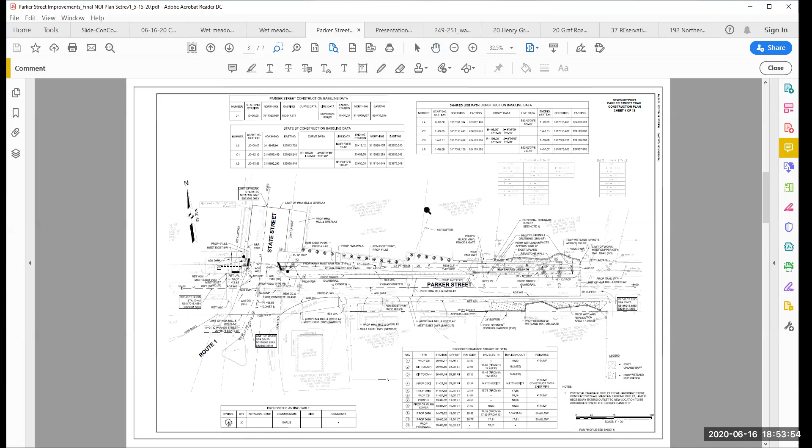So we were able to take a look at the A-series wetlands on Parker Street and look at the area of wetlands that would be impacted, as well as the area across the street that will be where the replication area is to be located. I'll let the commission speak for themselves on what they thought of that, but I thought the meeting was productive and it went well.

While we were out there, we did discuss the project with one of the employees at the Ace Hardware on the corner. One of the issues they wanted us to account for was a drain from their parking lot that outlets, they think, in proximity to the impacted wetland area. We did discuss that with them. This was an issue that Jordy Vining of the city had already discussed with the owner of Ace Hardware. We have a note on our plan for the contractor to keep an eye out for that pipe and that outlet, and if necessary, if they do run into that pipe, to extend that pipe and connect it into the drainage system we are proposing as part of the project, to make sure the water continues to have a place to flow to.

Could you expand a little bit on 'keep an eye out for'? Are you going to do some test pits and some exploring to see that, or are you just...?

Yep, I can speak to that. So essentially, we have a note that calls out the potential drainage outlet based on what the employees have seen in the past. Our surveyors were not able to locate that pipe. We think it's buried under sediment somewhere in the vicinity of the corner of the Ace Hardware property. So our note says: potential drainage outlet from hardware store, contractor shall maintain existing outlet and, if necessary, extend outlet to new location to be coordinated with the engineer and the city.

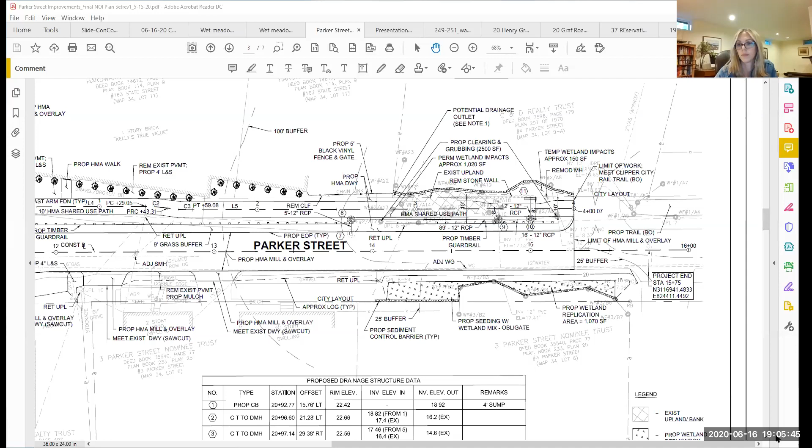I would expect there would be no change in their flooding of their parking lot in front of the store, unless while doing this work you accidentally come upon a broken pipe. Clear out stuff that's in front of the broken pipe, or at the end of it. Unless during the work it actually clears out an area where the pipe's backing up, then it would make it even better.

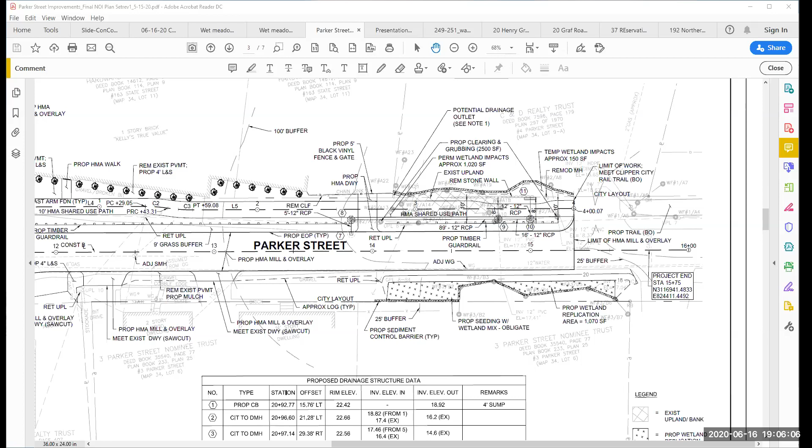Okay. What else? Any questions about the wetland replication area and how that's going to be handled? No, I think that was pretty clear.

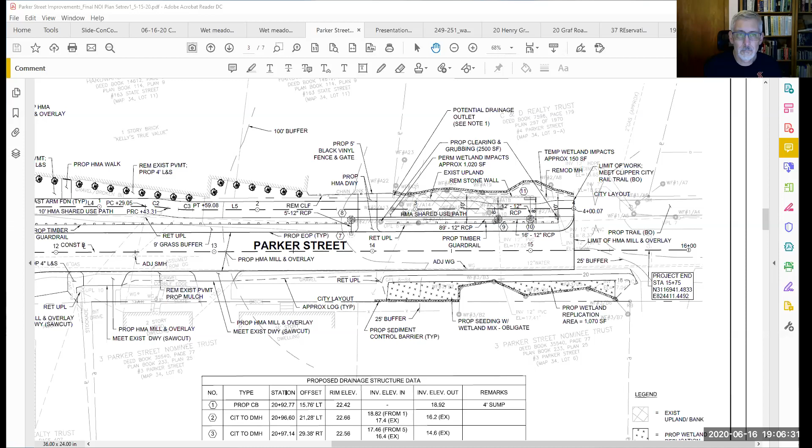Jordy, is there going to be a wetland scientist overseeing the wetland replication construction? I believe it's Mary Rimmer, is that right? Mary Rimmer. If so, that's great. If not, there should be someone on board. We should confirm that. We can put a special condition in that it needs to be overseen by a certified wetland scientist, monitored for 2 years, and all of those special conditions.

Pete, are you still there? The plan does call for oversight by a professional wetland scientist. But if the city standard is 2 years, then that would probably make sense to include as a condition.

So how does that work functionally with, we have presumably Mary, who's been part of the team to date, and there's the construction administration phase. And then in terms of 2 years out, does that mean that the city, through the planning office or maybe the Parks Department, essentially periodically hires Mary to go out there and inspect and monitor?

I would just say, you probably already have a contract with her, right? But if that could be extended or modified to include annual monitoring for 2 years for survival and success of the replication area, that might be a way to do it. Otherwise, you could do a separate contract with her. We've done that for some wetland monitoring with her in the past too.

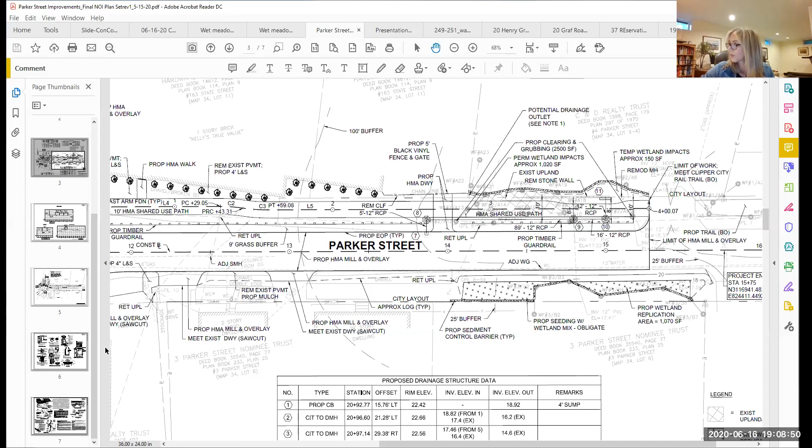Okay. All right, do we have anything else? No. I did not see anything. Anybody from the public have any comments? Seeing no raised hands, I'm going to assume not.

What do we want to do? Motion to close the public hearing? Second? Okay. Paul Healy, yes. Steve Moore, yes. Dan Warshall, yes. David Vine, yes. Jane Sender, yes. Ron DeCola? I'll take that as a yes, Ron. Yes, sorry, gotta unmute. And I say yes.

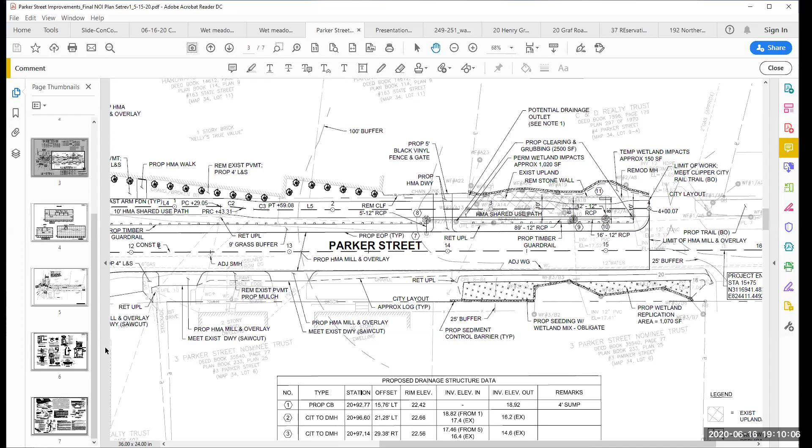Next item on the agenda is Michael and Karen Costello, 249, 251 Water Street. Notice of intent continued from technically May 19th.

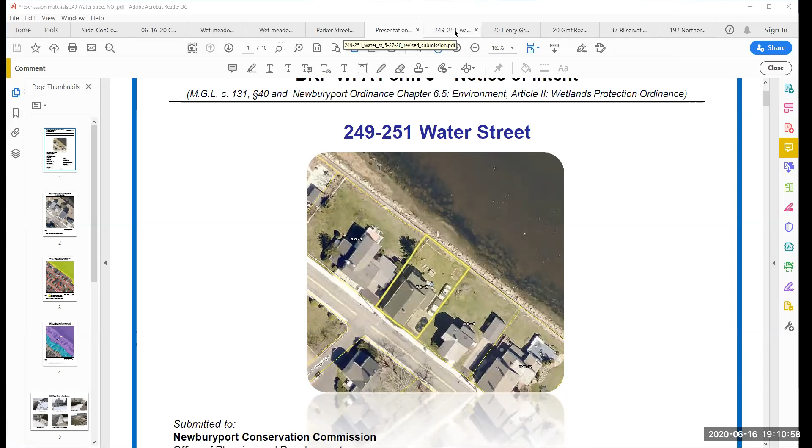I think let's just jump to the revision plans, which are at the end of the revision submission. Is that this? No, I think that's the original. Well, no, that is revised. Okay, so that's the revised one.

Also I've got Steve Sawyer, Eileen Graff, and Lisa Mead all here on behalf of the project, and in the audience out there are the Costellos as well, I believe.

Let me go over what we did. Since our last hearing, we held a site visit and reviewed site conditions. We took a lot of the comments from the last hearing, considered those, and put them together into some plan updates and changes. What you're looking at, we now have a plan set of 3 plans. The plan in front of you shows the different foundation lines, and we put a color-coded key off to the right under the stamp, trying to make that easier to read. So that's one thing that came out of the last hearing.

The other thing, because of the concerns about what we had in front of the structure to protect it, was basically a foundation wall with a filled patio behind it that held up the second floor deck and addition. We changed that over to a deck, now supported by columns. It's open underneath, and we put stone in there.

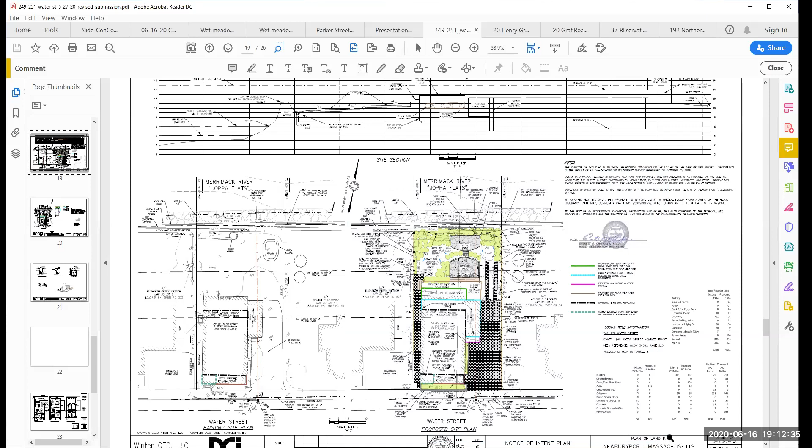I think it might show better on the next plan. If you zoom down, you can see where there's text within that area that basically says rock under. So what will happen is the proposed deck has rocks under it, so that any flood water would basically be dispersed by the rock underneath rather than having a wall there.

The other thing we did is we took the curbing around that patio, which had been vertical, and we turned it into sloped granite edging. So we got rid of a lot of the vertical elements, and the stairs are now open tread.

What I can do is turn it over to Steve Sawyer, who can go into a little more detail on the engineering updates that were done, things like backflow preventers, and some slight changes to the grading to make that work. I think what we've done is come up with a change to the project that actually improves the way floodwaters behave on the site over the current condition, where you have the vertical face of the house going right down to grade with nothing to break up the energy, and behind it a foundation that would not do so well if subject to any fast moving water. So, Steve, do you want to describe some of the changes you made in terms of adjusting grades to make sure water wasn't flowing off site?

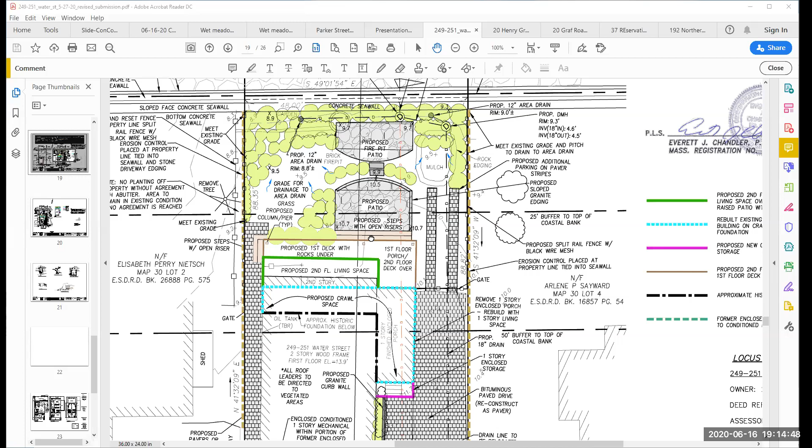Based on the site visit and the concerns of the commission, a couple of things we did, as Tom mentioned. If you pan up a bit, just that seawall again, the section. The top of that seawall is roughly, what is that? I believe it is 11, a little bit over 11.

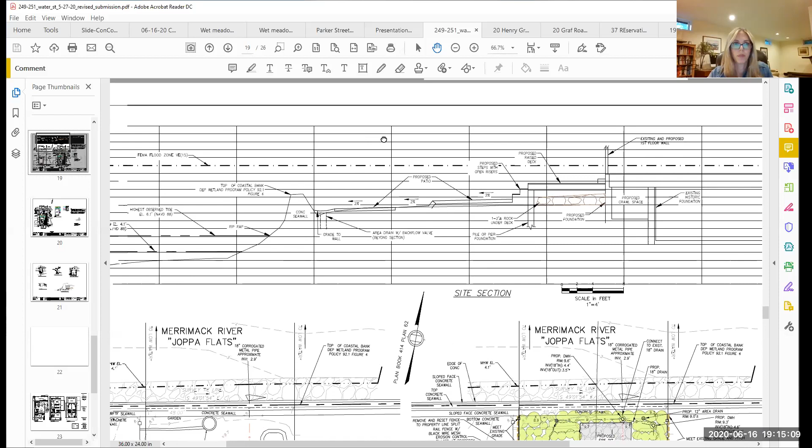So what we did is, say you had a flood of around 10 or so, and a lot of wave action that ran over with any kind of velocity, we took all the sharp edges off, so the water would run up and run through the stairway, the open stairs, and then dissipate. The energy would dissipate. Prior, as you remember, we had a filled patio there with a face, so there would be some refracting off of that face where those two stair treads are in those types of events. I think this addresses the concerns we heard, and it would definitely mitigate any of the wave energy, being absorbed through the stairs and underneath the building.

Important note: once we get up above elevation 11 into 12, all bets are off. It may tend to break the wave energy down, because prior there was the original vertical face that would refract it. Now at least there'd be some obstructions to break the waves down, so you wouldn't have a vertical face where waves would tend to refract off in different directions.

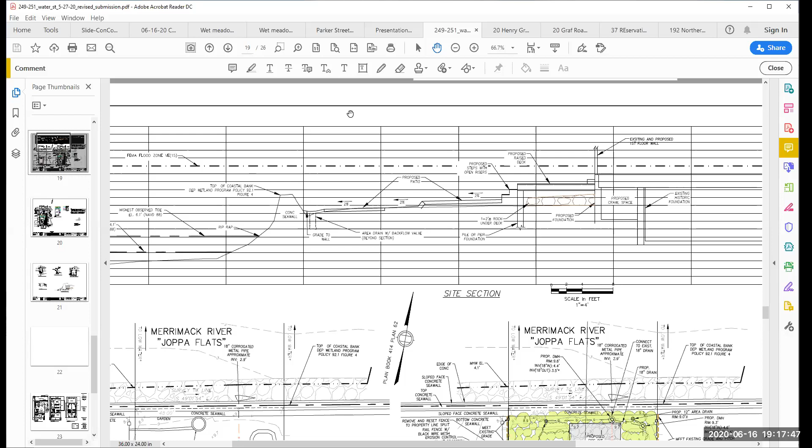So with that, we provided an improvement there, along with the backflow preventers in each of the area drains, to prevent any surge, storm, wave energy, or ocean flow from flowing up and into the lot through those structures. So that's a major improvement. We did add a fence.

There was a split rail. They have a dog, so we added a split rail fence to the right side of the property. Let me pan back up to the site plan.

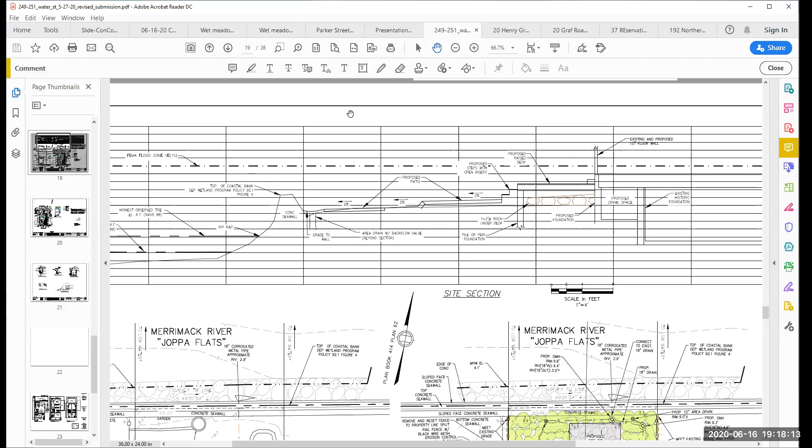Okay, oh sorry. Yep, got you.

So what happens is right at the back, at the interface where the permeable driveway ends and you have the two track pads, there'll be a gate there, so if there are additional cars they can pull them in off the street. There's a fence gate that runs across the driveway and then back to the seawall. That's just going to be a typical fence, I think - a split rail fence with black wire mesh, so it blends in. You really don't see it.

So that'll provide basically full flow through in that. I think that's about it. I think that's all.

Oh, if someone needs to mute, who's not hearing anything? Everyone okay? I think Steve was breaking up a bit now and then. Hopefully it's not my internet service. Try to sign in on something else. I can hear Jane, but Jane, you can't hear me? I don't hear anything coming from Jane right now. I think Jane came onto the commission after this had already had its hearing open, so hopefully we can get that resolved before the new hearings. Maybe I should raise my hand. I'm hearing somebody talking - is that you? Not yet. I think we can hear Jane, but Jane can't hear us. Jane seems frozen still. I think strange, Jane may have frozen - she was speaking before the meeting, we transferred over. Perhaps it's her internet access. I can tell you in other towns that have had issues with sound, when they turn off the video, sometimes that reduces the bandwidth demand. Hey Jane, do you want to try? Jane already turned off her video, so.

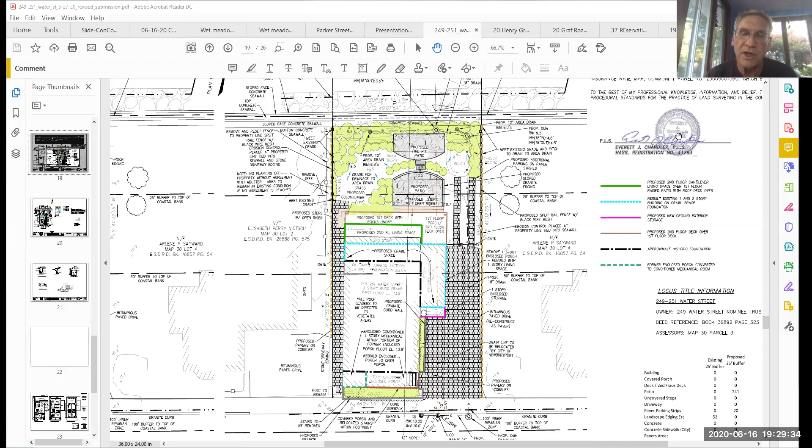Well, getting back to the question about whether things are being built in accordance with FEMA, breakaway walls, things of that sort — is the structural person confident that everything else is appropriate in that regard? Take away the elevation aspect of it.

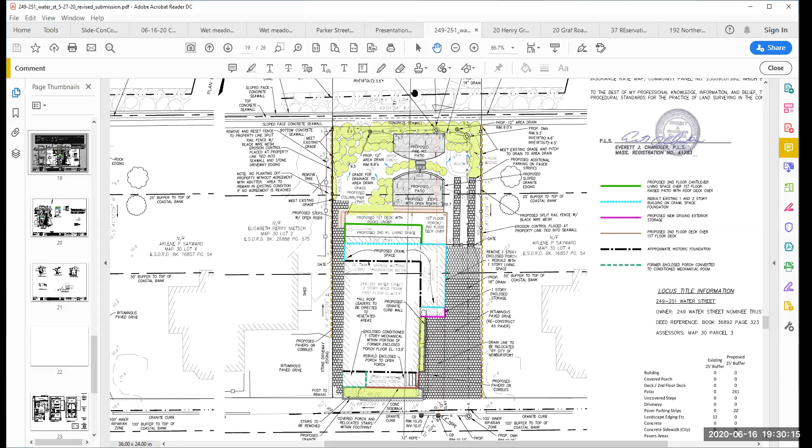So the structural engineer looked at the property, understanding it was historic and that we couldn't, that we were going to have to maintain the existing historic structure. And she was the one who suggested having one of the foundation walls seaward of the historic wall. If you recall, there's sort of a double layered foundation there — something that was newer than the historic. So yes, in terms of what we've proposed, she protects the more vulnerable part of the structure, which is the fieldstone foundation.

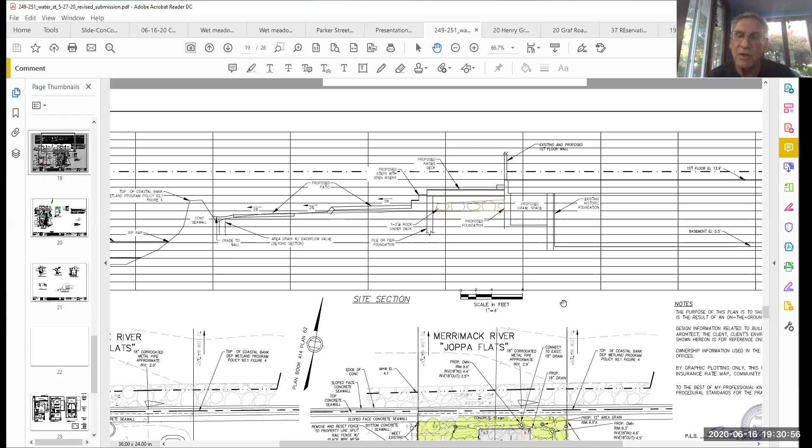Putting in that — yeah, that is all good. And the elevation, it's pretty clear that what you're doing is fine in that regard. I'm just asking if the recommendations and requirements of the building code beyond that are being looked at, and bottom line, I'd like to make sure that if there was a flood, this house and the additions are done properly in accordance.

Well, so with that regard, the additions are on the second floor. The expansion of living space, which is very modest, is on the second floor, well above the flood elevation. And we are actually doing things like removing the utilities from the existing basement and putting them up above in that bump out on the front porch. So we're actually making it more resilient. Lisa can address the specifics of how the code applies, but it's all been done in consultation with structural, trying to mitigate and do the best design possible with a historic home that really can't be elevated up.

Right, so that's where the waiver comes in under the state building code for historic homes. Mike and Karen are very concerned also, as mentioned by the commission and expressed by them on the site visit, that to the extent they can improve the existing conditions while retaining the historic structure, they have done that. For example, as Tom suggested, the expanded living space is on the second floor above the proper elevation. The utilities have been taken out of the basement, and to help break the flow in front of the house, we've changed the deck and added the rock. So to the extent they can, they have certainly done that.

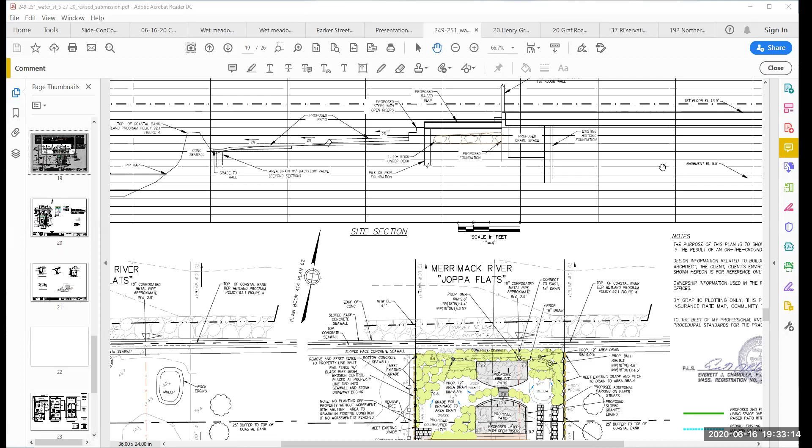Everything that we're proposing with our builder is going to be off the FEMA list, whether it's flooring, insulation, or windows, all of which will meet those FEMA standards.

Yeah, and those were exactly the aspects I was concerned about. I didn't feel the waiver had anything to do with those, well, it has some connection, but I didn't think the waiver would waive any of those. It does actually, David, and that's not what Mike and Karen are doing, but actually the waiver does waive all of that stuff under the building code.

It's just a blanket waiver, based on the one reference you cited, or is it 780 CMR 105 3.1.1? Right, if it's a historic structure and it continues to be a historic structure.

Okay, at this point I'm satisfied with the design that you've done, and I appreciate the waiver. So I don't want to continue on this path either. I just want to make sure that things have been done right, that can be done right, and it sounds like that's what you're saying.

Yeah, and I think as noted, we've demonstrated in the updated narrative, and through the plan changes, that we do have a path where we comply with the regulations completely. We're actually improving, I think, flooding conditions over existing. So I think we've overcome that presumption that these things we're doing have a negative effect. So we would ask the commission to issue an order of conditions approving the project.

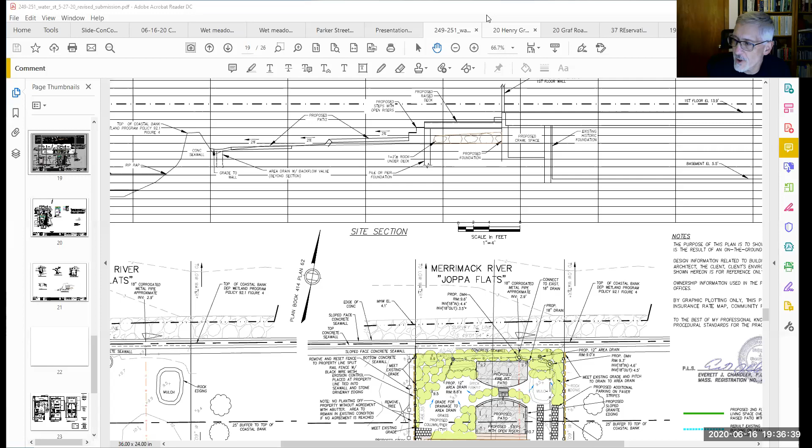Okay, next item is Roy Cottignani, Sports Medicine North Orthopedic Surgery, care of Conserve Group, Inc., 20 Henry Graf Road. Notice of intent continued from 5/19.

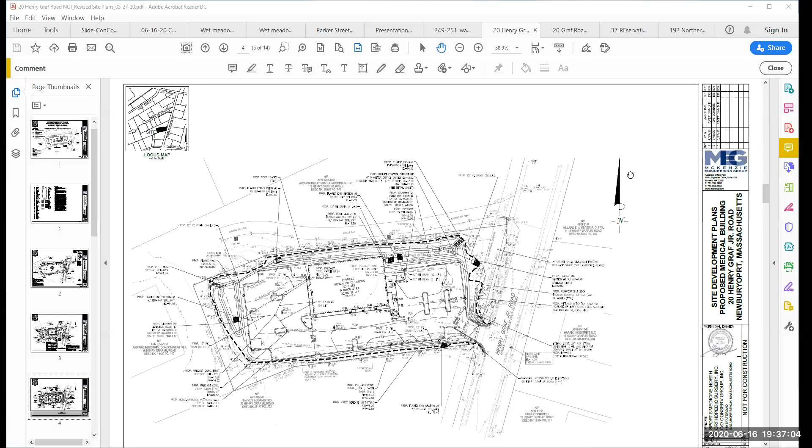Okay, Tom Hughes with Hughes Environmental Consulting, with me also is Brad McKenzie. So the plan updates that we submitted include a few things. One is the planning board hearings resulted in removing 2 parking spaces, so we actually increased the amount of green buffer. Those are in the bottom of the plan view on the left and the right.

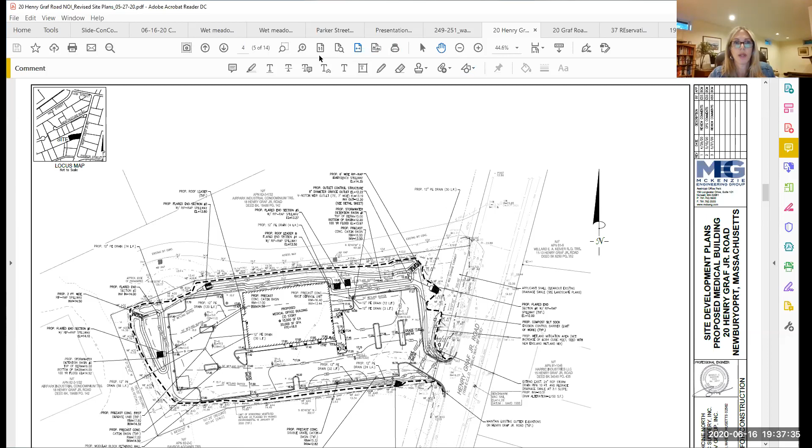Is this the most recent plan that you've got up? This is the updated plan. This is the most recent plan we got before the last meeting. Okay, so perhaps the next sheet, but if you look in the lower left of the plan, you can kind of see where there's more of a corner, a green corner.

Yeah, so like down there and then at the sort of bookend of the parking lot. No, lower left. Sorry, yeah, left, lower left. All right, thanks, Brad. So right in here, you can see where there's more green space. We had parking that extended further in that area. Sorry, I'm going to try a different view here.

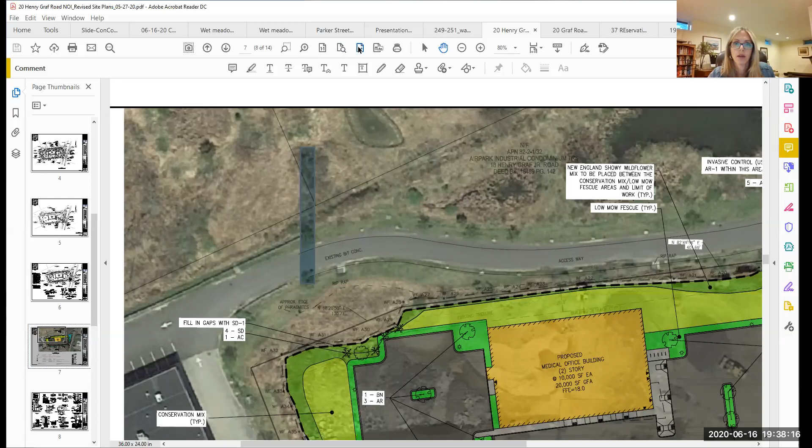Just a sec, okay, so that we can. All right, this is the landscape plan, this might be a little bit more helpful. And then we'll go over some other changes as well.

The other thing that we did is compensatory grading mitigation for the city engineer's suggestion that we grade off rather than having walls at the entrance. So remember, we had a little bit of impact to the swale, so what we've done...

I'll have you go to the grading plan, do you remember which, is it C3? C2, the grading plan, yeah. Okay, hold on a sec. I believe, is this the grading plan? No, this is not that one, go to the next one, down. Next one, front. There you go. Yeah, okay.

So if you can zoom down, you'll see that what we've done is we're cutting into this little upland area that is adjacent to the swale, essentially widening out the swale, creating wetland, but also creating a little more storage in this area. This is an area where the city has double barrel culverts that run across to the drainage ditch on the other side, so it's actually a nice spot to provide a little extra storage.

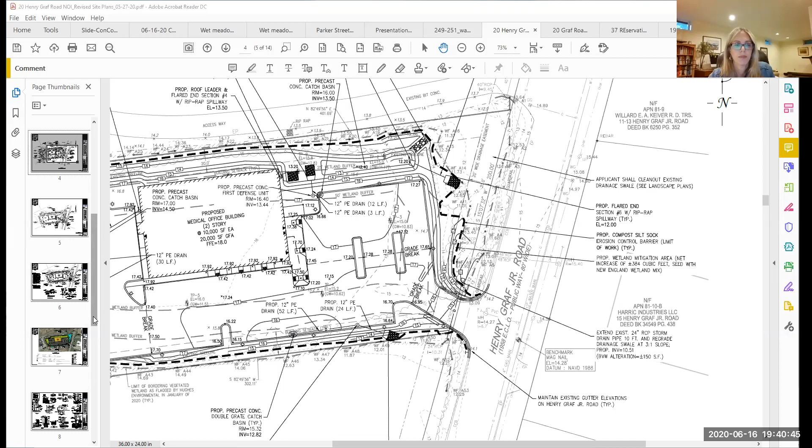And then the other things we provided have to do with the operation and maintenance of the landscape, which was a separate document. I can't remember before the last hearing if I put it all together into one. We've given you the invasive species management plan, but we also gave you an O&M for the ongoing landscape, since you wanted whoever's maintaining the landscape to be able to use it. I think it's the landscape maintenance plans that were submitted 5/27. Okay, hold on, I'll see if I can find that.

Yeah, they are on the city website. There are 4 sheets and they're half-size plans. We did them so basically anybody should be able to print them from a printer that can at least do an 11 by 17.

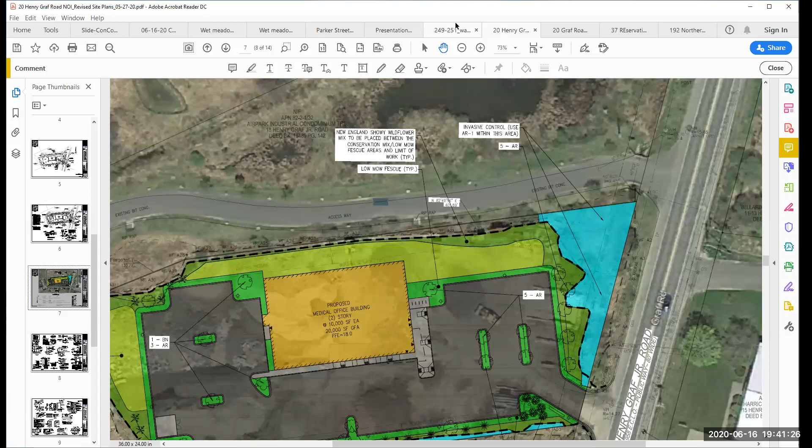Landscaping, yes, here, we got it. Yeah, I'll bring it up. Open that up, we can go through it. This is it.

If you go sheet by sheet, what you'll see is that we added things like dimensions, the width, the edge of parking. There's a couple posts that we put in where you couldn't easily measure it. Behind the building in the upper left, at that turning point off the building, there's a post there. So we added posts in places that weren't easily dimensioned, like a 5-foot strip off this type of thing.

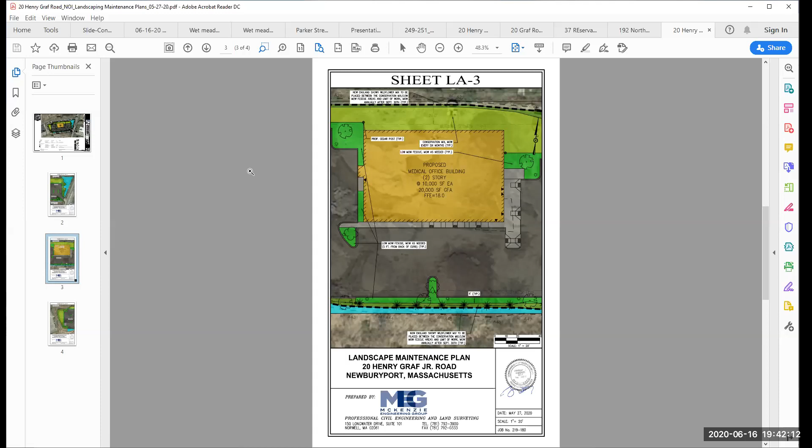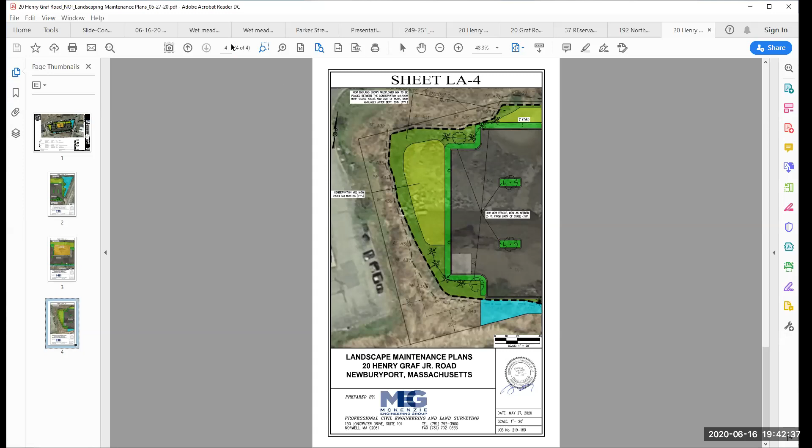So we've put notes on how often things are mowed and when. The pollinator meadow is once a year, you'd have to zoom down because I can't remember the conservation mix, how often that's done, but each item is noted. So now when somebody is charged with maintaining the landscape of the site, they have a clear map and clear guidance that says what gets done, where it is, and how often.

And then the last thing we did, if you see the areas in blue on that plan, those are the invasive management plans we propose to do. We are looking at dealing with invasives between the site and Graf Road. There's a bunch of woody vegetation, and there's also some Phragmites. The Phragmites is growing around fairly nice alders.

The invasives work would start after the site work is done, because a lot of the invasives on site are going to be grubbed out in the construction part. So once the grading is complete, that's when we'll start that invasive work. In the invasive plan, we talk about planting these areas with some of the same species proposed in the buffer, with the idea that all of these areas would be native, roughly 95% native by the time we're done.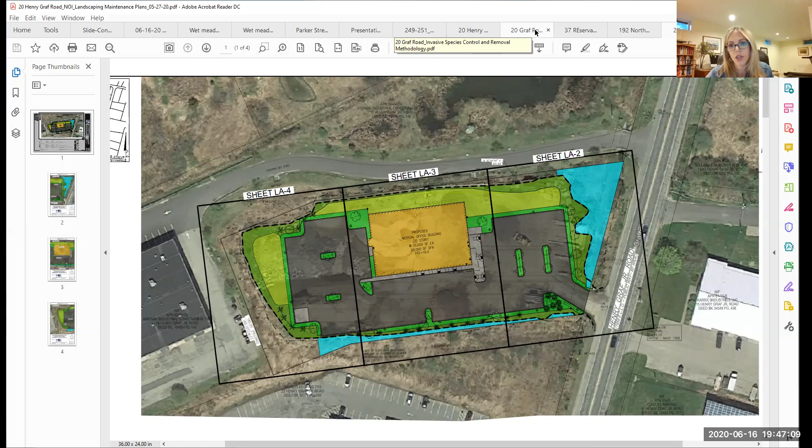I communicated with Caitlin Sullivan, staff for the planning board, and let her know we would have a special condition in our order of conditions covering implementation of that invasive species program, so the planning board didn't need to worry about it.

I do think what we're doing, especially the work towards Graf Road, is in line with what the planning board would want. It'll have a much cleaner look from Graf because it's the invasives that are the mess there, and the natives going in will be prettier to look at. It's really a win-win for both boards, but it's more under you guys in terms of detailed review.

Well, the chair, Bonnie Sontag, had contacted me about that. She was certainly interested in it. Well, this looks good to me.

Tom, are you going to be the one overseeing the invasives control program? I sure as heck hope so. My contract right now is to get them through permitting, and I really like working with them and the group going in there, so it's my hope I'll be working with them on an ongoing basis.

I believe you will. I think we'll have a special condition that a wetland scientist needs to oversee and monitor that work. Sounds good.

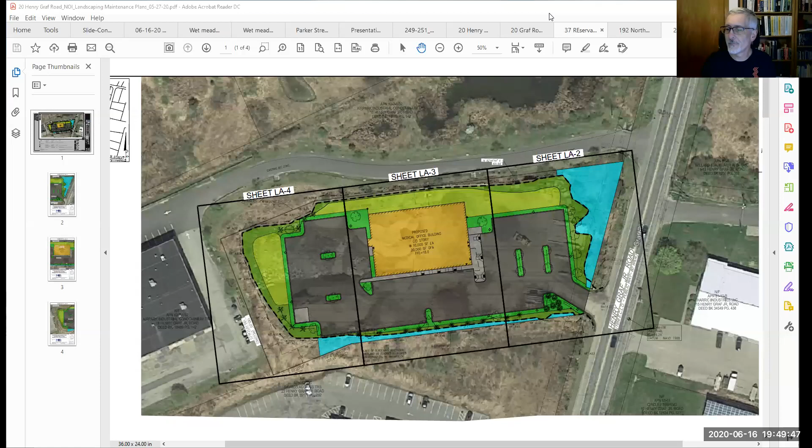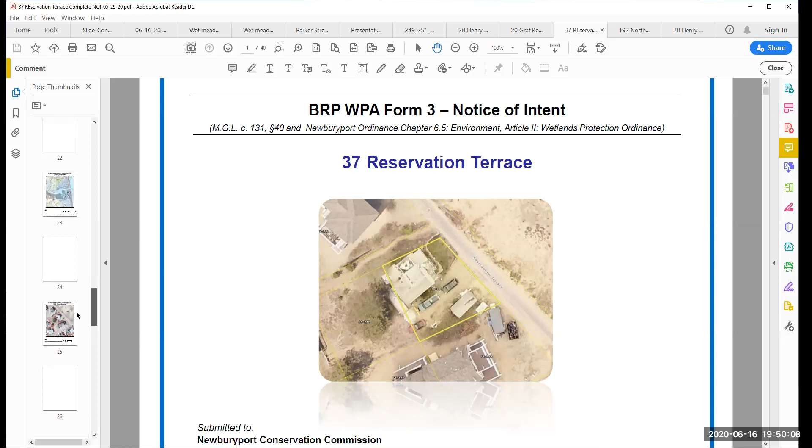Hi, Tom Hughes with Hughes Environmental Consulting. I apologize, I didn't do a presentation file for this, but if you can scroll down quickly to the aerial photograph, right after USGS. The blank pages are just for double-sided printing. So this is the site.

This is the 2019 aerial photograph. If you look, you can see the left-hand side of the house, the western side, is actually encroaching onto the adjacent property. There is an actual easement that covers that. The property has a single-family home with an outbuilding, a driveway, some concrete stairs. It's a fairly heavily impacted site as is right now.

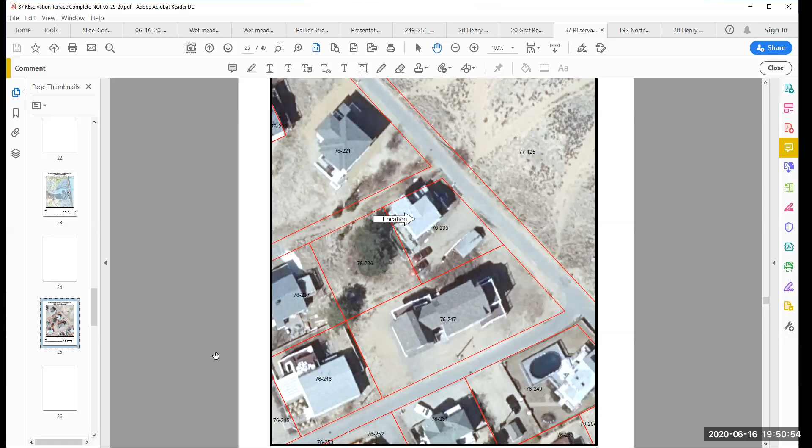If we can go on to the site photos, that's probably a decent one to look at. So this is 37 Reservation Terrace. Again, you can see a big driveway, the existing home. If you look in the upper left, there's concrete stairs that get you into that house on the front porch. This house has a full basement.

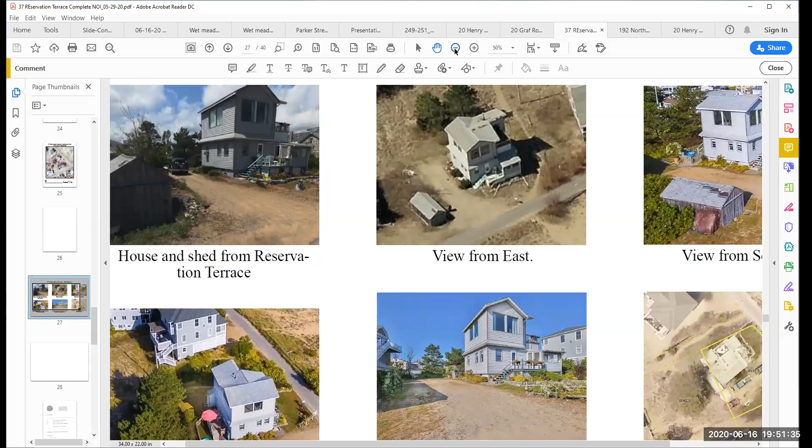If you just want to pan through the photos, I think you can get a sense of the site. This gives you a good flavor of what the site looks like today. If we can then go to the site plan.

Okay, so there's a little confusion in that the PDF doesn't have a profile view. I think the paper versions I submitted did. I emailed off the PDF with the profile version, but it's irrelevant since profile views are here. You mean the elevations, like this one? Yeah, there was an elevation on the bottom of the last iteration of the site plan, but...

This is good enough. So what we're doing, we're removing concrete steps. We're doing first and second floor additions that total 210 square feet of additional living space. It's a very modest project, mostly infill over the existing developed site. There's a little bit of straightening out of the driveway, and the areas where the driveway is removed get planted.

Very minimal impact. The additions are over 2 feet above grade. They line up with the existing first floor of the house. The basement stairs, the bulkhead stairs, need to be rebuilt. I think that's really most of what happens on the ground other than the driveway.

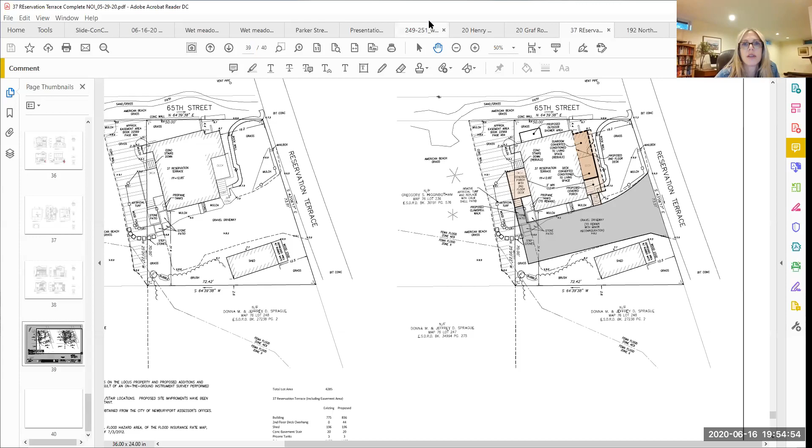But if you look at the architecturals, you can kind of see that. I did email that, I don't know if you can actually pull it up. I did email the one with the profile. Okay, let me just see if I can find that. Yeah, it was when I was preparing tonight that I saw that.

There's an outdoor shower being added also? Yeah, that's at the sort of northern end of the building. I think I might have Eileen speak to you about the details of that, but it's just a low-tech outdoor shower.

Tom, I don't have the other view that you said you sent. For some reason it wasn't in the file I have. It might have been online. That's all right, I think the architecturals we provided give you the same information. They just show you that you have clearance above grade.

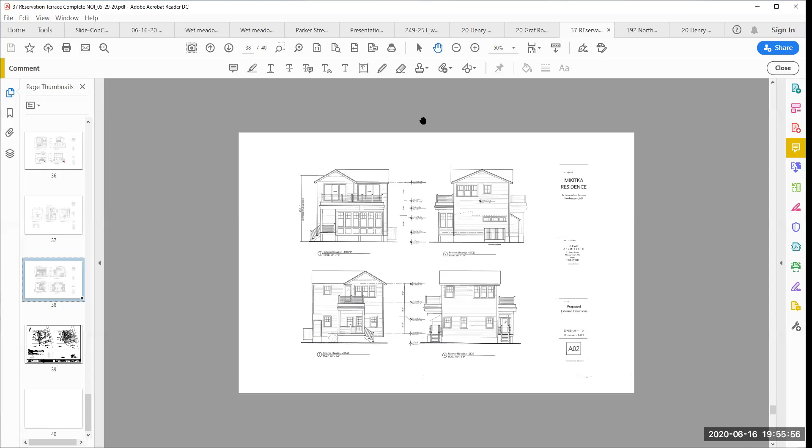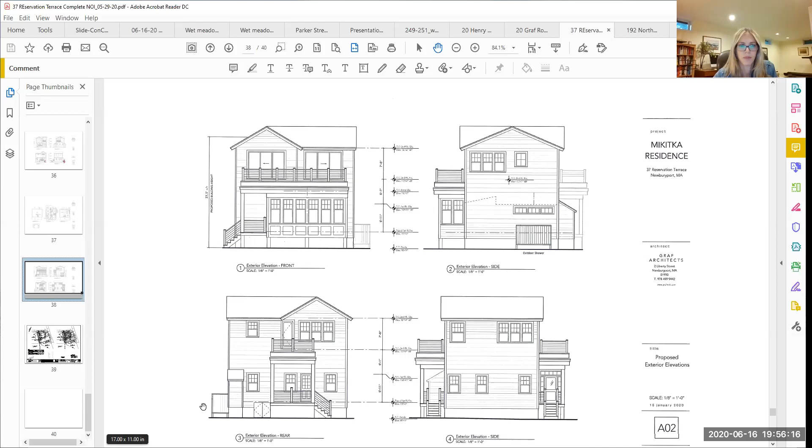You want me to switch to that right now so we can take a look? I'll have Eileen talk to you about the shower area after. If you zoom in, you can kind of see how we've got clearance above grade. It is above the flood elevation. You can see that shower area in the upper right there, the upper right elevation view, yes, and there. You can see it's open so you can see the feet, but it's gently screened because it's a shower area.

Is that over lawn, the current condition? Eileen may be able to answer. Can you hear me? Yes, it's Eileen Graf, Graf Architects, 2 Liberty Street.

It's sort of a mix, some grassy and others, about 50-50 in that area around the corner. There's not a lot of travel or impact currently, so it's had time for things to grow on that side. The front has the passage with the front door, and the back has all the activity with the back deck. It seems to be a play area and gardening area on the back side, so this is the quietest area on the property, giving opportunity for more growth.

So how do you get to this shower? Is there a pathway being put in? We hadn't discussed that exactly, but we can put in a clamshell type path. That would be really nice there, and it would most likely be from the backside, as that's most frequently the way in.

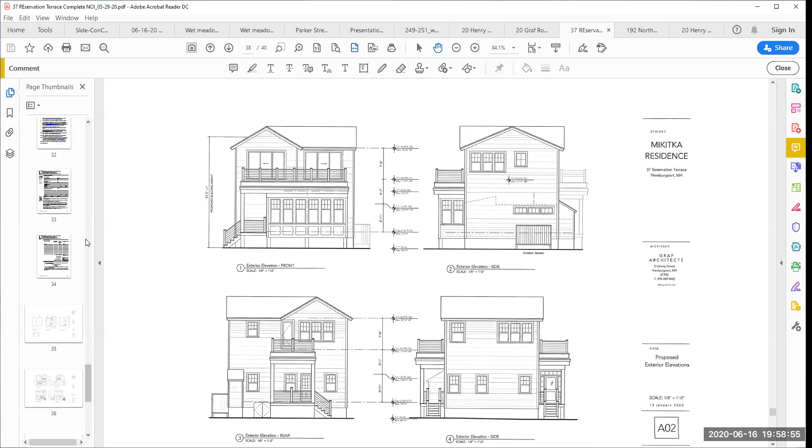It's a heavily impacted site, with a lot of wear around the perimeter of the structure. I just couldn't recall that specific area. Tom, is there any proposal to improve the landscape of this site? I know you're not disturbing much of it, but given there will be walkways, patios, and things like that.

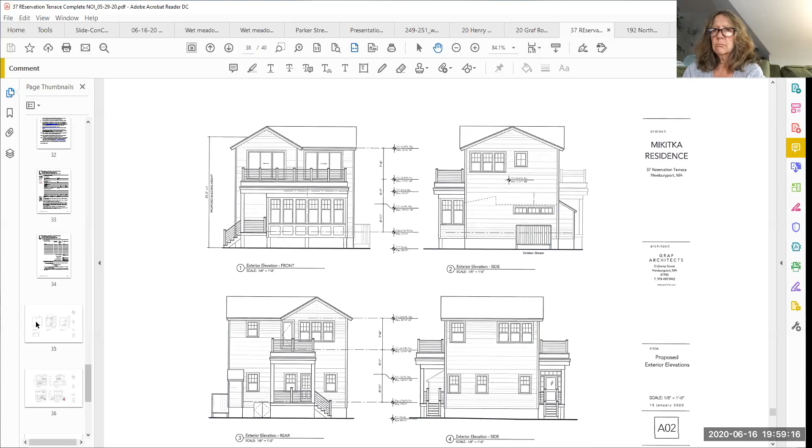Yeah, so we're doing a couple things. One is where we're removing some structure—if we go back to the site plan, where we're removing structure we're putting in a patio in that area. Yeah, a clamshell patio is called for in the application.

I'm just wondering, since we don't have a landscape plan, it makes it hard to understand how this is all going to work. Right, we can provide you with more detail on the landscape. The area—if you look at the driveway shape, it's got this little hook off to the left—would be planted right here, down in there. But most of this is over areas that are completely impacted right now.

Little, if any, measurable vegetation impact from what's happening—I suppose the shower would probably be the exception. We could certainly provide you with that. Although with the shower and the patio, even though it's already disturbed, you're adding the shower, the patio, and some pathways, so there will be no possibility for future vegetation in those areas. It might be nice to propose some new vegetation in the areas where you still can.

Yeah, we could do that. I think in terms of meeting the vegetation standard of no impact, we're there, but we could provide additional plantings if the commission wanted to condition a landscape plan showing some additional plants. Where the patio is going, there's the bulkhead stairs right there, and that area is well worn from use of the bulkhead. There's a lot of wear on the site as it currently stands anyway, so I think there are some opportunities where we could do some work.

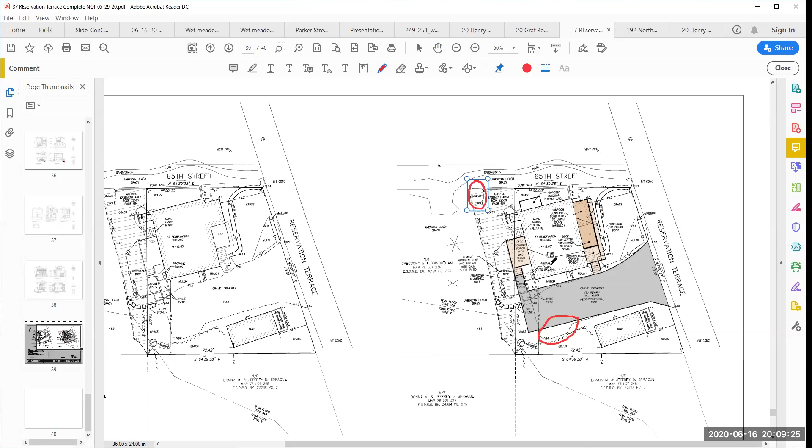Those cross hatches are the easement area. And who owns the easement, who's it with? The fee interest, the underlying interest, is owned by the abutter, and the easement - the right to use it and keep the structure there - the rights are with the applicant. For some reason I thought the easement was out on 65th Street, but I guess it isn't. No, it's with the adjacent private property.

In this section, 65th Street is just a paper street with a sand path that meanders down through it. But any plantings or anything else you'd do in that easement - do you have the ability to do it, or do you have to check into it? I'll double check. I didn't review it right before the meeting, but they have a right to maintain the structure, the areas, and access and egress. I'm almost positive they have a right to maintain it and make plantings. We'll double check for you.

If we do have that right, we'll come back and propose the removal of that mulch and some plantings there. If we don't, we'll address the planting areas in the rest of the site. Given that, I think I'd like to continue this to the next meeting before we move forward. Yeah, it sounds like there's just enough needed that it'd be better to continue.

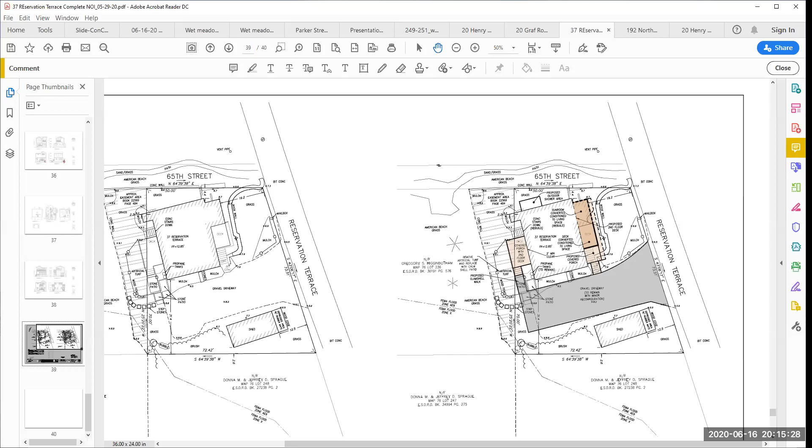All right, do we have anything else? Okay, Lynn Smith, I saw your hand up earlier. Did you want to speak? I'm going to allow her to. Lynn, if you unmute yourself right now, you'll be able to speak.

Thank you very much. No, I just wanted to clear up, you guys were wondering if that was grass or not, and I'm on 65th and walk there every day, and it is in fact grass. So I just thought I'd pitch in. Okay, well, thank you.

All right, can I get a motion or not? Motion to continue the public hearing?

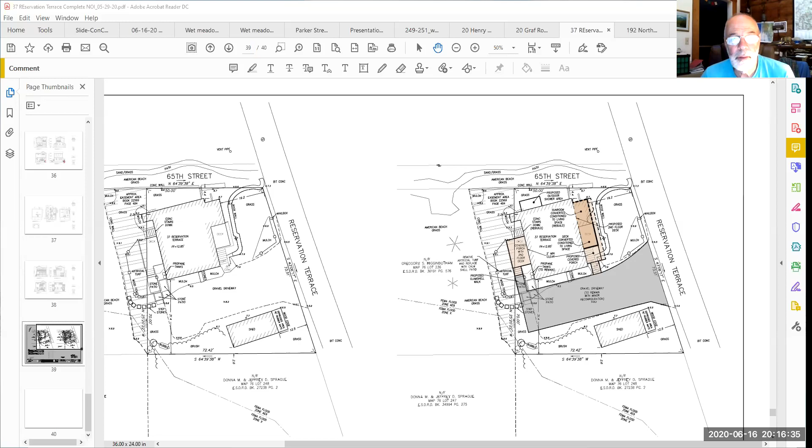Second. Roll call vote: Paul Healy, yes. Steve Moore, yes. Dan Warshall, yes. David Vine, yes. Jane Sender, yes. Ron DeCola, yes. And I vote yes. Thank you.

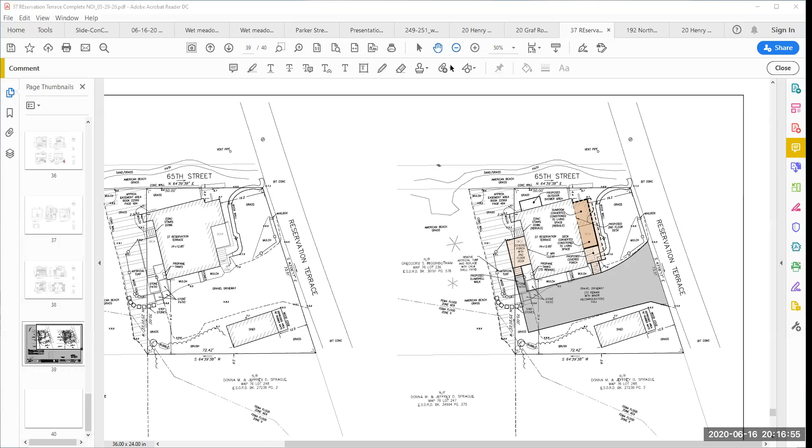Next item is Christopher Horan, Seacoast Homes LLC, 192 Northern Boulevard, notice of intent.

Okay, Tom Hughes with Hughes Environmental Consulting. Eileen Graf is the architect on this one as well, she's with us tonight, and I think Lisa's there in case we need her for anything. Chris Horan is also logged in, who is the applicant.

So if you remember, you approved 2 other structures for Chris last summer. One was, I think, 5 63rd, and the other was 3, but they were basically the next 2 structures over. At the time, Chris was looking at doing all 3, and it was sort of too much work at the time, so we kind of deferred doing the permitting on this lot.

But this is a grandfathered lot with sewer access. And you can see from this photo on the cover of the NOI that it's been used for parking in the past. There's also the driveway, the old driveway to the house next to it, extended onto the property. It was to the left of the house, and you can kind of see it in that aerial.

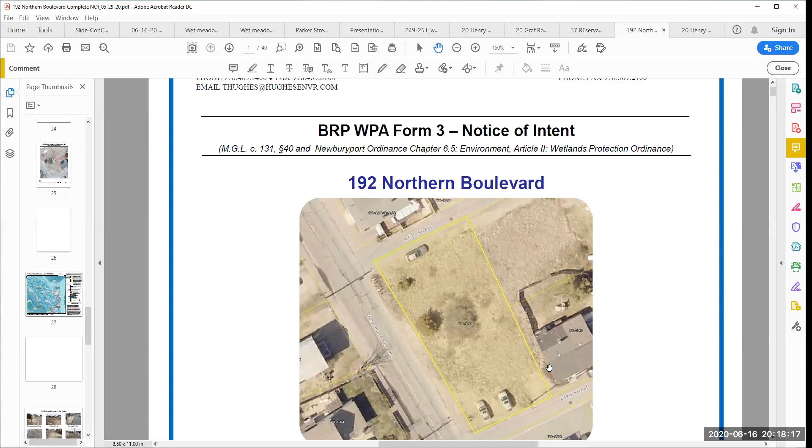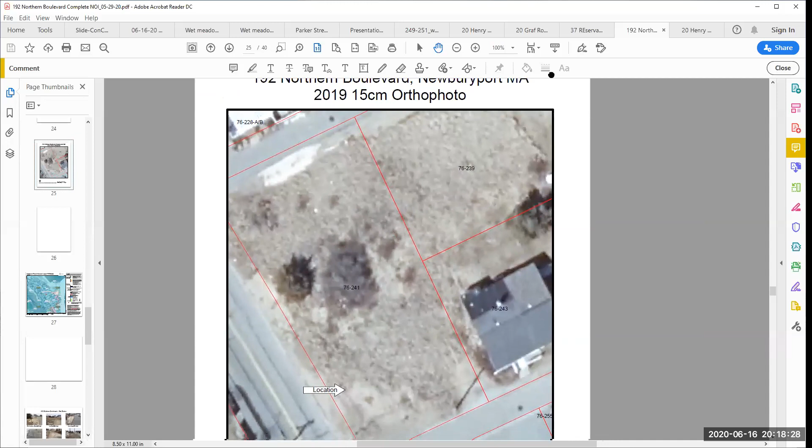If we can go down to the other aerial, again you can kind of see on this the parking areas and the areas where the vegetation has been impacted. Those areas do tend to be kind of along the road and in the corner of the property.

If we can go to the flood map. Before we do that, Tom, is that house gone now and it's a vacant lot? The house is being replaced right there, that is under construction. I think it may be pretty close to complete. It's one done, you permitted last summer. That's one of the new homes, correct? Yeah, right next to it.

So if we can go to the flood map. Okay, if we can zoom in on that pin.

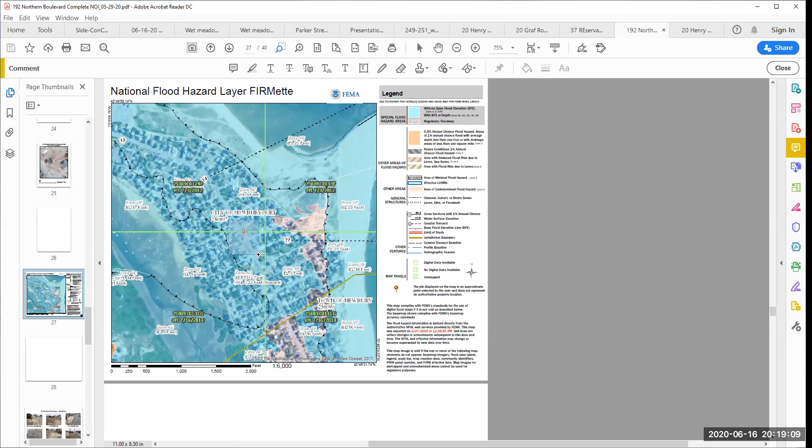It's not very clear. Let me zoom out a little bit. Yeah, okay, there we go. That's actually good right there.

If you look to the right of the pin, you can see the blurry gray area, that's the house next to it, and the green line runs right through it. So a little more to the right, that's the house next to it right there. The area where the pin is shown is actually in the middle of the street, but that is AO, and the area to the right is AE. So this is all AE, and then there's a part of the site that's also AO.

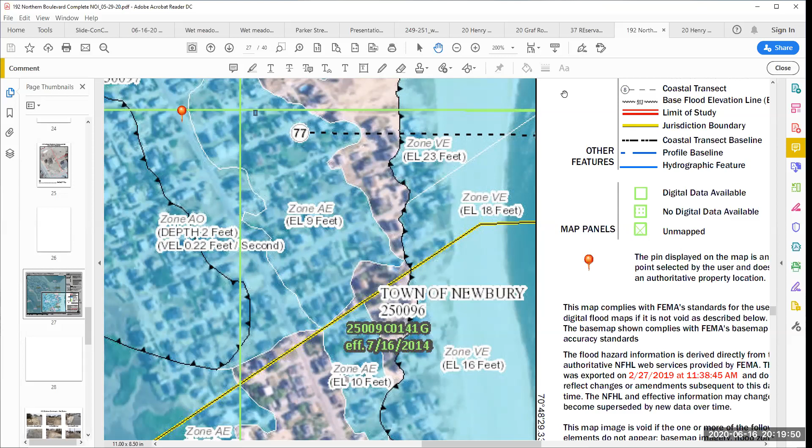Now if we can go on to the site photos. There's not a lot to really look at here, but here are some of the areas on the site where there's sand, which were documented. Some of it's more or less pure sand, and some of it's covered with gravel from years of snow plowing into the lot.

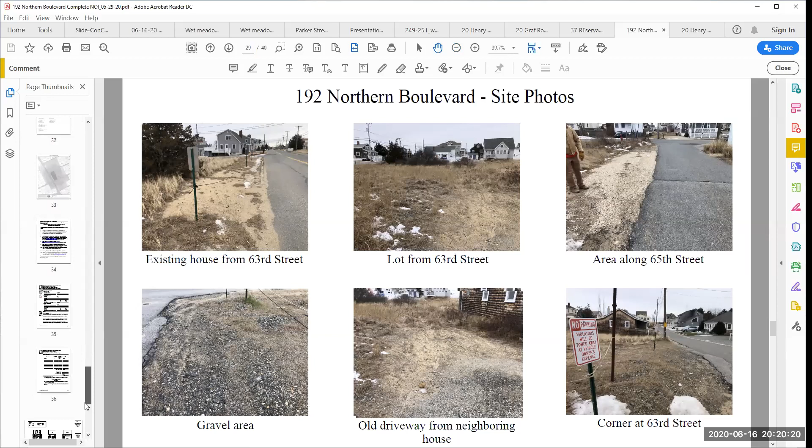And then if we can go down to the site plan. So what we've done is a relatively small but skinny house that sticks within the AE zone. We're not proposing any construction in the AO zone; everything we're doing here is in the AE zone. We come in with a driveway to 20 feet off the zoning setback, and then have this skinny house. It's elevated up on pilings with parking under, with a utility chase and a couple of stairways running along the side.

It's 2 stories, and the total square footage of the house, ballpark, is something like 1,600-ish square feet. So it's a fairly modest size for the house. I think zoning would probably allow more, but the AO zone does limit you, and also the amount of vegetation on site limits us in what we can do.

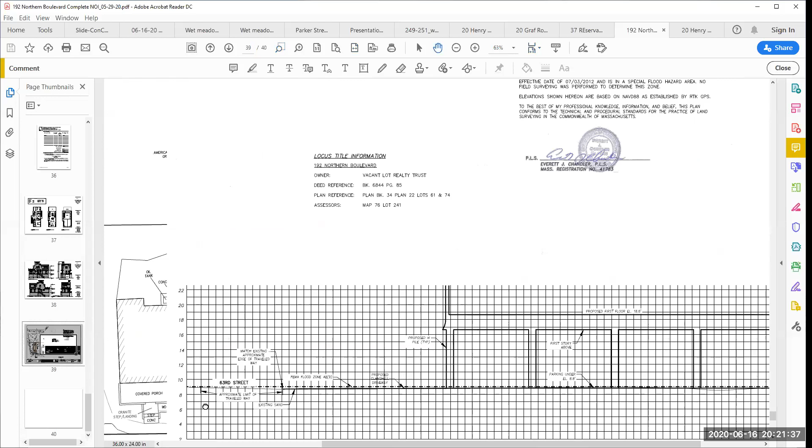There's a table on the plan showing the vegetation numbers. The current total area of vegetation is 6,589, and proposed when done is 6,718. So we're planning on planting all of those sand areas that were identified on site, and anything disturbed during construction will be planted with dune grass.

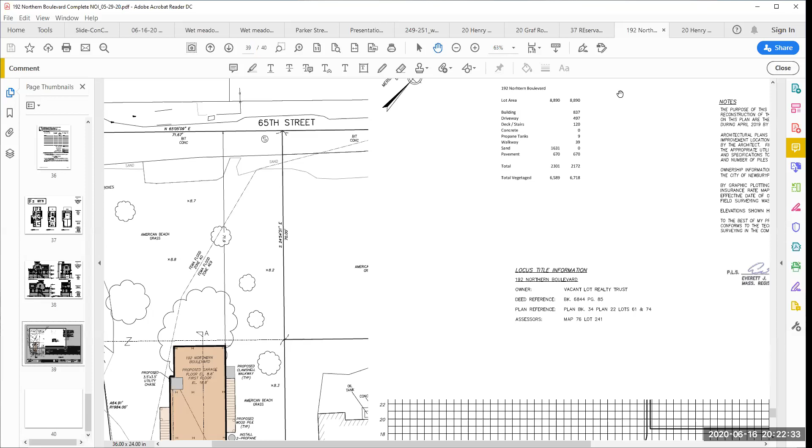As we've done on other sites, we have the option of coming into the commission with a plan showing some native shrubs. I think Mara got Julia a plan with a whole bunch of shrubs, much more shrubby than what we've done for the minimum, and it's a nice plan. We may do something similar here, supplementing the American beach grass, but at a minimum we'd cover the sand areas shown with American beach grass and repair any damage from construction.

So we're pile supported, way up above the flood elevation. We've got the utility chase sized per regulations, so it's an elevated house up on pilings. It's actually pretty straightforward, but I'm happy to answer any questions about the design. We also have skirting coming down to 2.5 feet above grade at elevation 9, the flood elevation, same as what we proposed on the other structures you already approved.

So, Tom, I went out and looked at the site this morning. Yep. And there's that huge shrub right in the middle. Is that going away? It's not entirely going away, I think it's a cluster of shrubs.

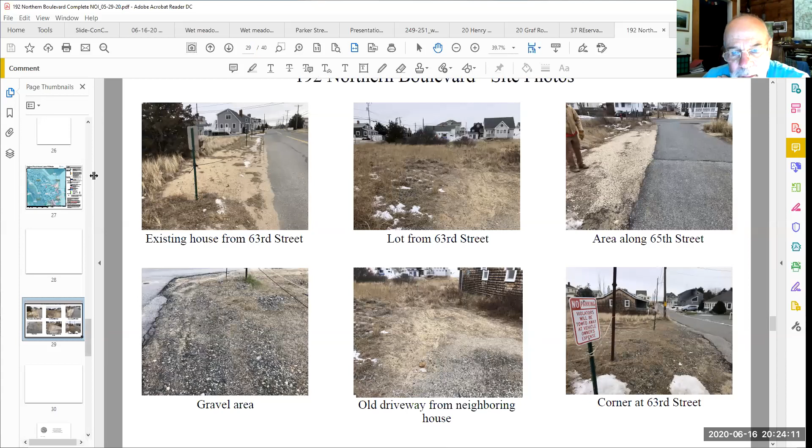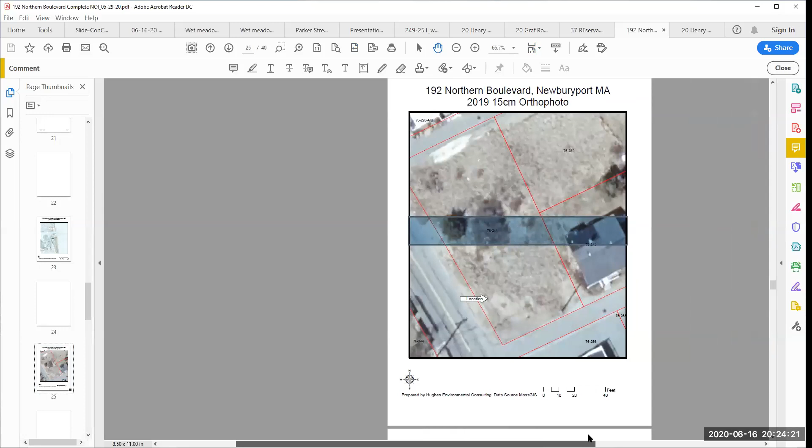If we can go to the photos—I know I've seen it a million times, but my gray matter is deteriorating during these COVID things. I think you're talking about this one, the larger area, that giant ugly... it's interior to the site more than that. We would commit to replacing in kind any woody vegetation lost. I think it's multi-stem, not just one area. You can see it in this picture, that big gray blob in the middle—I think that's a bunch of plants, and we are cutting into the edge a little bit, but the structure is kind of up and over it, so we don't really need to impact it very much.

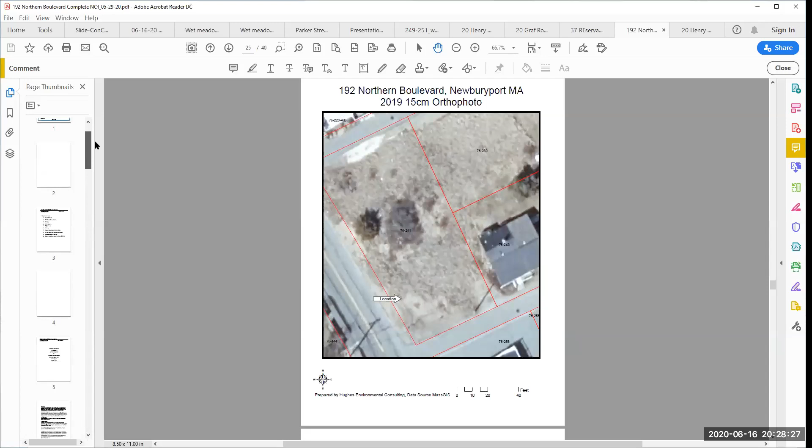That corner right now, I think, is an area where, because there's no house there, a lot of winter snow gets piled up every year. There were two cars parked out there this morning, right there. If you look at the aerial on the cover, which I think is from 2017, and older aerials, there's cars that have been parking on this lot for a long time—probably right about where those are. I think it's been a neighborhood vacant lot that's just been used by people for this kind of parking.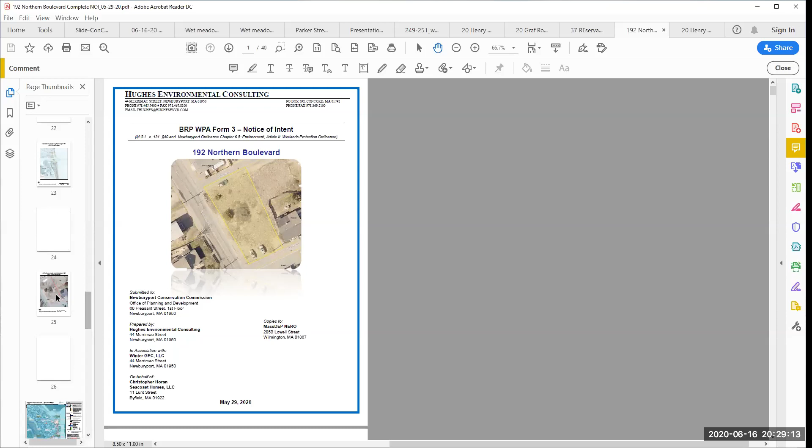We could talk about putting something like a split rail fence, a foot or two in off the pavement, or off the property line. In the case of Northern Boulevard, the property line is off the pavement a bit, and there's an awful lot of sand off-site between the site and the road—we're not counting that because it's not owned. But let's look at the site plan for a second.

The other thing is, if I remember right, if you look at the property line up at the top—one thing we're not proposing to do, but we're well within our rights to do—is that 65th Street pavement comes 8 or 9 feet into the property up top there. So there's a big area of the property that the city has actually paved.

And you can see there's also a big area of the property that's on Northern Boulevard, which we didn't count. That Northern Boulevard right of way includes vegetated areas and sand areas that approach the property line. But if you look at 65th Street, the actual pavement comes significantly into the property. And if we were to tear that out and plant it, it would be a much easier time making the case for vegetation with you guys. But we're trying to avoid having to do that.

But Tom, let's not play that game. Well, it's an impacted part of the site. But regardless, we do have the sand areas, and I think we could talk about putting in a split rail fence along the perimeter so that those areas would no longer be impacted by parking cars. And it would protect the planting areas that go in, and it would also stop the winter plow impacts.

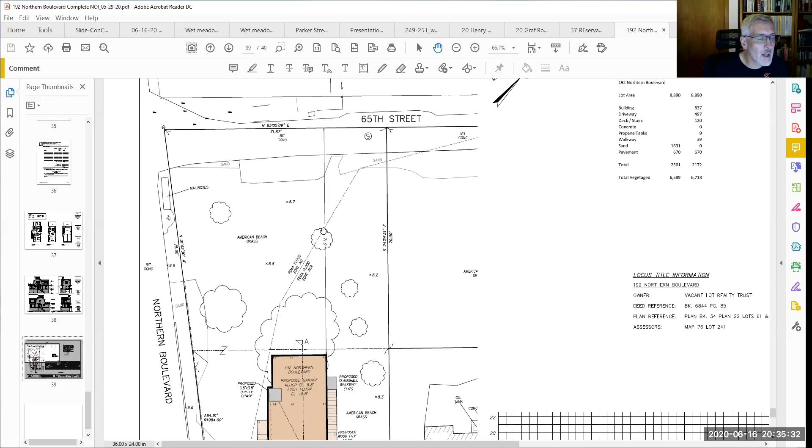Okay, so 1 p.m. on Friday. Yep. There are a couple of members of the public who have their hands raised.

Just when you're ready, Joe, are we done for now? I will take it we're done for now. Okay, how about Lynn Smith?

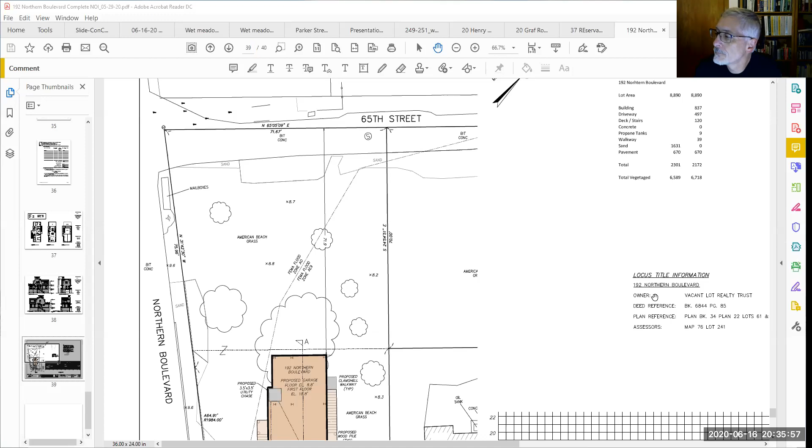You want to unmute yourself, Lynn? Yep, hi, I just did. There's a few concerns that myself as well as many of the neighbors around here have, and my husband's here with me, Joe Smith, also a resident of 65th Street. We just want to voice our concerns with the whole building of another structure on this small plot of land.

This plot of land has already been totally disrupted. Someone just knocked on the door. So this section of land has already been disrupted by much building, and it has displaced not only the water, but the wildlife in the area, which includes a nest of cardinals.

That bush you guys are talking about does contain a nest of cardinals. If you look at the street, it's enough. It's enough.

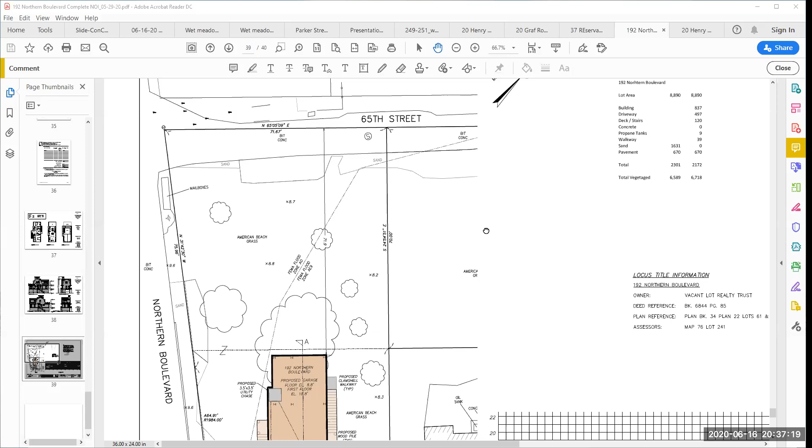I think everyone has the same concern in the neighborhood. When do you stop? How much is too much? When is there any open area available? I appreciate that he wants to build more and make more money, and I think we're all entrepreneurs, we all want that. But at some point you've got to stop.

This is zoned a flood zone for a reason. If he keeps building, what about the water table? What about all of us that have basements? What about all of us that have a 2-foot crawl space that currently fills with water? How are we all affected? I think that's pretty much the neighborhood consensus: we need to stop.

No more. We've lived through this for 6-7 months. He has his 6 units. It's enough. Can I also say that the existing structure put across the street is so substantially larger than what was there.

Taking up so much more square footage, in a hard rain all that water's got to go somewhere. The property that was there used to go down several feet from the street. Now that's all been filled up, and there's more fill to come, possibly higher than the street level. All that rain is going to run directly into my yard.

I have a very dry basement right now, and I'm concerned I'm going to get flooding. I don't think we should do any more building on these properties until we've had a few cycles of severe storms so we understand the impact of the building that's just been done.

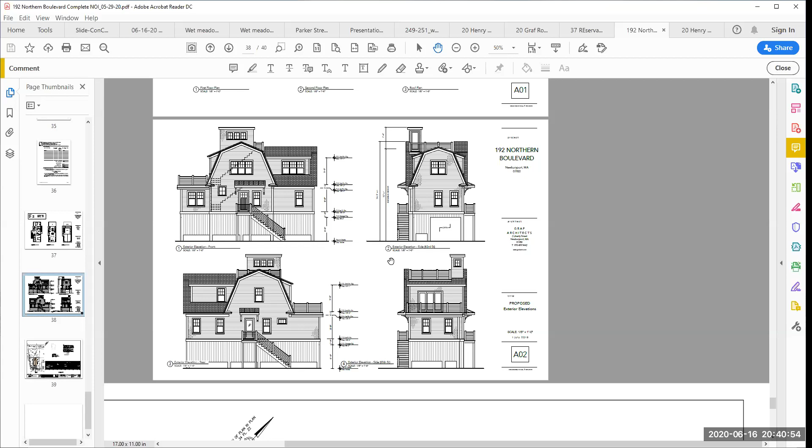So if you're talking about putting up fencing around there up to the street line, I don't think that's gonna make the neighbors any more happy, especially on 65th Street. So those are our positions on this place. I don't know if this is the right forum to talk about these things, but we felt that we should let you know what the neighbors are thinking. I know some of the neighbors are trying to get on, can't get their phones or speakers to work on their computer, but several are on. So thank you for allowing us to speak.

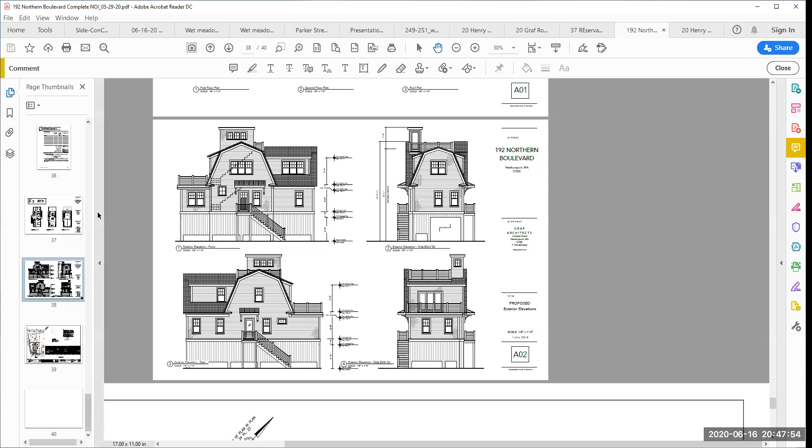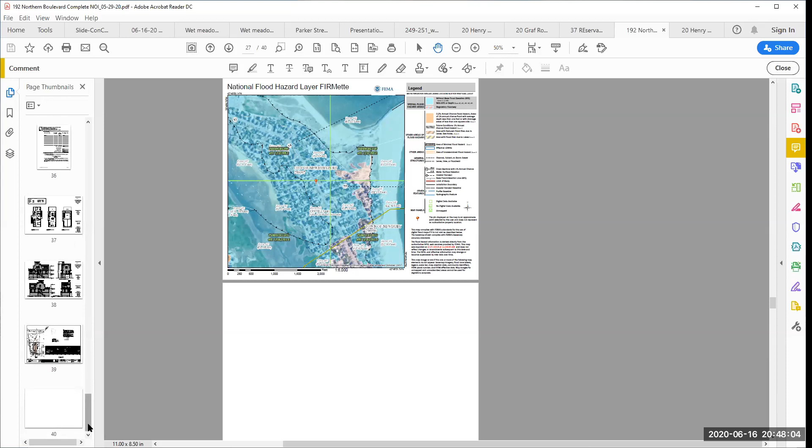A year ago, Chris Horan stopped at my house and told me the good news. The good news is that they were building all of these 6 houses. But the good news was that the property across from me was not to be touched. That in fact, the land had sand and water problems and flood problems and everything you could think of, and it would not be touched. And what I needed to do was focus on the fact that that wasn't going to be touched and disregard everything else that was happening. It really shouldn't be a concern to me. And following his lead, I did that.

Did I know that he was going to backdoor this house 6 months later? Absolutely not. Did I think that this is a very unmindful step? Absolutely. I'm vehemently opposed to a 7th house in that little area.

Every day I'm subject to looking at one house, the beach house. It encompasses the space that I used to look at the sky. I no longer can see the sky. I am thankful that I am catty-cornered over to that house and not the monstrosity 6-unit, 5-unit building, because that I find to be very offensive. And I don't understand why they would build something that large and in the style of the Gambrel. It's not indicative of anything in this area. It sticks out like a sore thumb.

I think it's offensive. I think it's offensive to the neighborhood and the community, people who have lived here for years and years. I think a lot of things are changing in this country, and this is something we need to pay attention to. As regards to parking, there was never any parking to the degree that was trampled on by these construction workers.

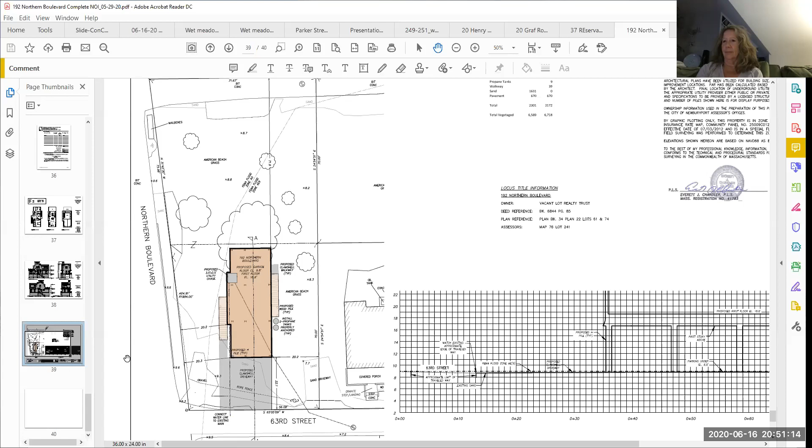The important issue for me are the points I made regarding being told that nothing would be built on that area. So when the hearings came and went for the 6 houses, I turned a deaf ear. It wasn't concerning me because I had that area that wasn't going to be touched. And now that they're built and there's no way to ask that they no longer be there, now we're on to the 7th house. These houses are selling for a tremendous amount of money.

I've looked at the profit. They have a construction loan, I'm not sure of the figures now, I didn't put them in front of me. But we're looking at an incredible profit margin here. And as a result, what is this neighborhood getting? Nothing. Absolutely nothing. I am vehemently opposed.

I also am very concerned that this neighborhood received only 1 day's notice. We haven't had time to do any organizing of the community. There's grassroots organizing that can be done here very quickly. I'll start tomorrow. I can also tell you that we need to speak with an attorney. Something like this cannot be decided today or anytime soon.

It's absolutely outrageous that there will be 6 properties selling in excess of $500,000 each. $899,000 is the beach house. And now they've decided that isn't enough money to make. $2.7 million in profit isn't enough. They've got to add another house.

And these houses are ginormous. They go up to the middle of the sky. Not only are they taking the land, but they're taking the sky as well. This is outrageous. And the style of these houses is not even conducive to this neighborhood. I think it's a slap in the face to the long-term residents who live here.

And I haven't had a moment's time to organize, speak with them, and get a group together just so they can voice their concerns. 1 day's notice on this. If this isn't a backdoor type of slip-this-in situation, and after being told by Chris Rand, standing on my deck, my property looks directly out into this area.

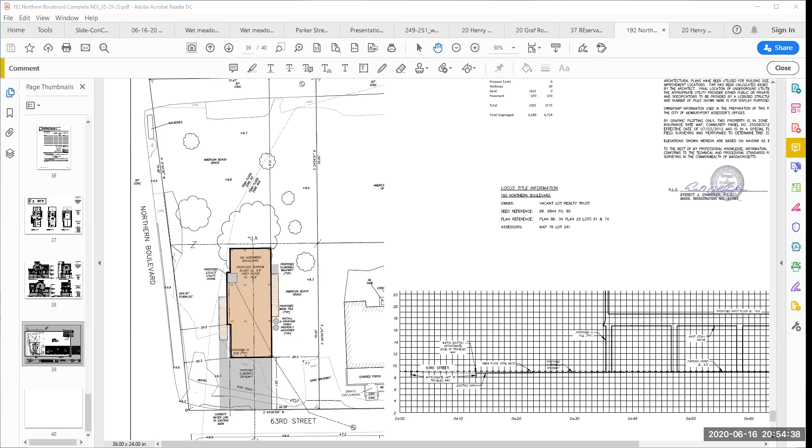So we're going to need an attorney to go over all of this. I implore you to not do anything regarding this. Allow me to organize the community here. Let's get a grassroots organization going, get some attorneys, and get this straightened out, because after the 6 houses we've lived through, $2.7 million in profit is just enough for me. Thank you very much.

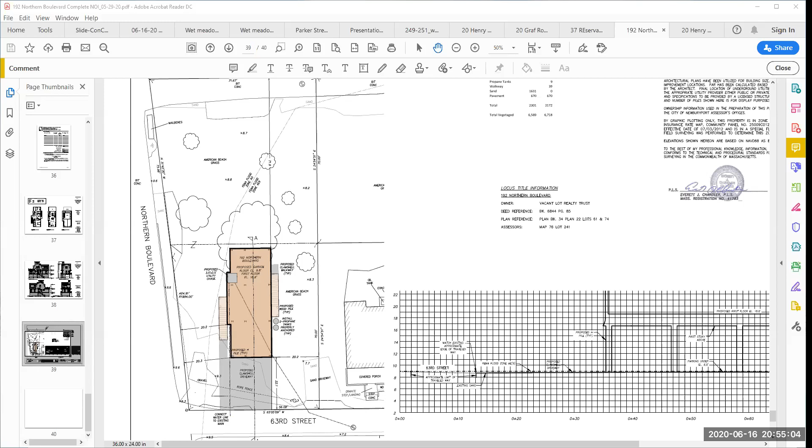All right, thank you, Barbara. Well, we won't be deciding tonight. Has this property gone up in front of the planning board yet? Doesn't, Mr. Chair — Lisa Mead, Talerman Costa — it doesn't require any other approvals other than the Conservation Commission. Okay. So, is there anybody else from the public?

Mr. Chairman, I want to note two things. One is when I said approximately 1,600 square feet of living space, that's on two floors, so the area of the house is 800 square feet.

The other thing I wanted to emphasize is I understand there's been some construction parking impact. As I said, we did not count those areas in our unvegetated areas. The unvegetated survey and work was all done before construction started, and the photos in your package are all pre-construction. So we're not trying to take any credit for anything, and we are committed to repairing any damage from construction folks who have parked there.

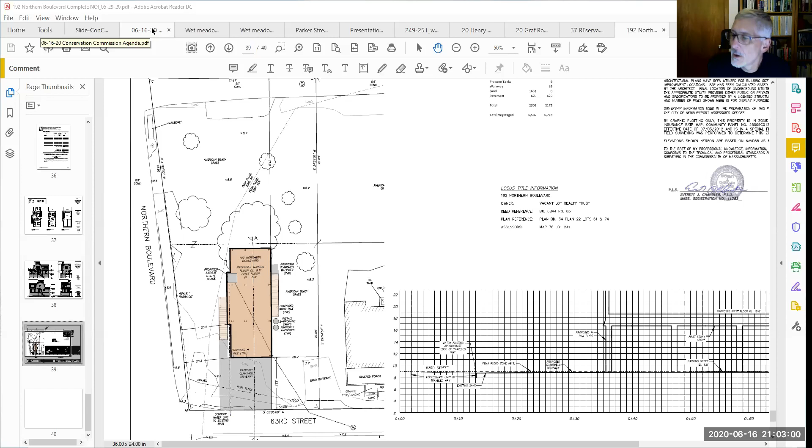All right, our first order... What does that mean? They basically didn't do anything, they just voted. Oh yeah. Muted. Okay.

Special conditions for that project are primarily related to the wetland replication area. Construction of the wetland replication area must be overseen by a certified wetland scientist. They recommended or suggested that would be Mary Rimmer, but we'll just say a certified wetland scientist, with 2 years of annual monitoring to ensure there's 75% coverage of wetland species. If not, after 2 years, a report shall be provided specifying necessary alterations to the wetland replication area, including any additional plantings required.

Okay, does anybody have anything they wanted to add to that, or is that okay? That sounds good. Did we want to say anything about what they do when they find that pipe, or if they find the pipe? Or do they have to come back to us if there's any change in the plans, or just assume they're going to do the right thing?